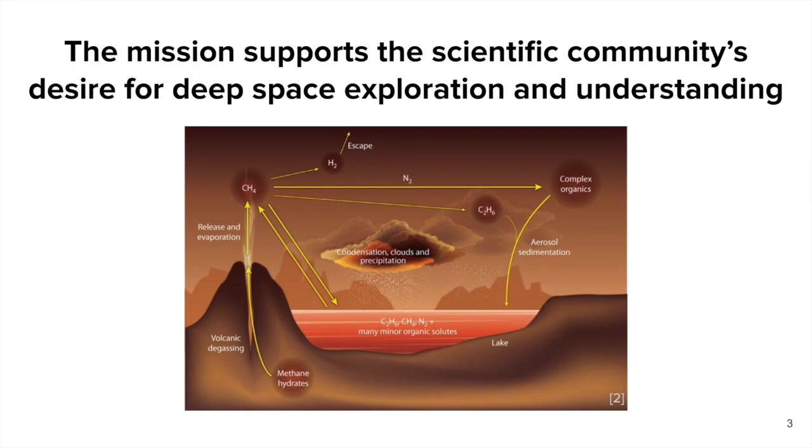An important component of attaining this goal of scientific discovery and exploration is the distance involved. At its closest, there are roughly 1.2 billion kilometers between Earth and Saturn. This means that signals from Earth to Saturn, and therefore Titan, take a full hour and a half going either direction.

This means that our vessel must be completely autonomous. We can't wait 3 hours every time we need it to do something.

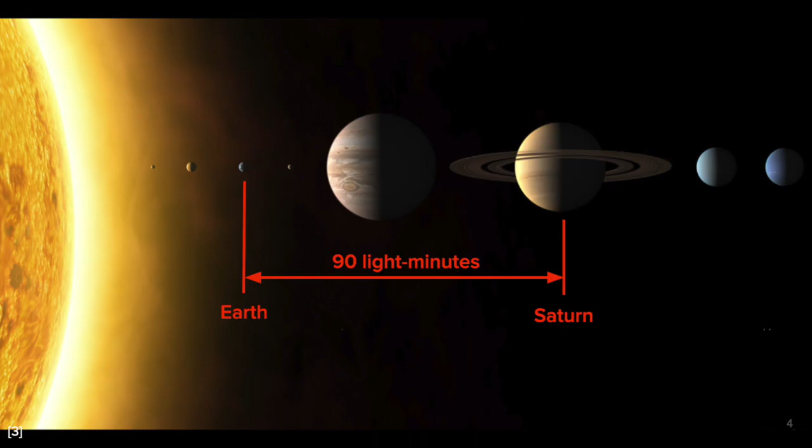Orbiting around Saturn are 15 roughly moon-sized objects named after the Titans of Greek mythology. The largest of these bodies is our goal, Titan.

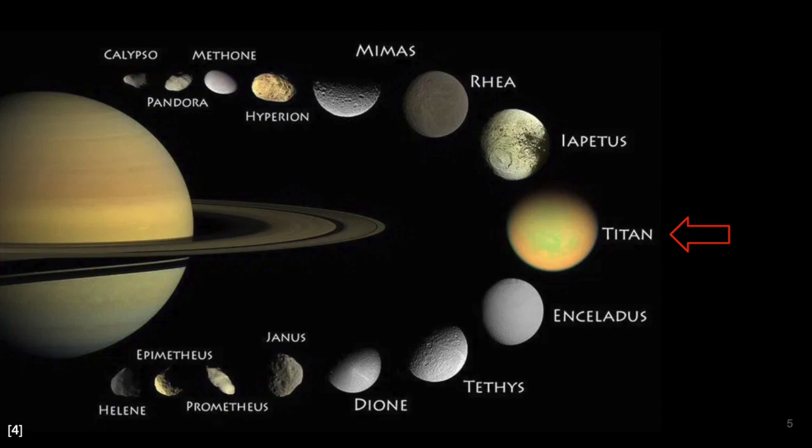Given a spacesuit capable of handling the cryogenic conditions and an oxygen supply, a human could feasibly walk about Titan's surface. The 150 kilopascal pressure is not too dissimilar from Earth's 100 kilopascals, and the gravity is comparable to that experienced on Earth's moon.

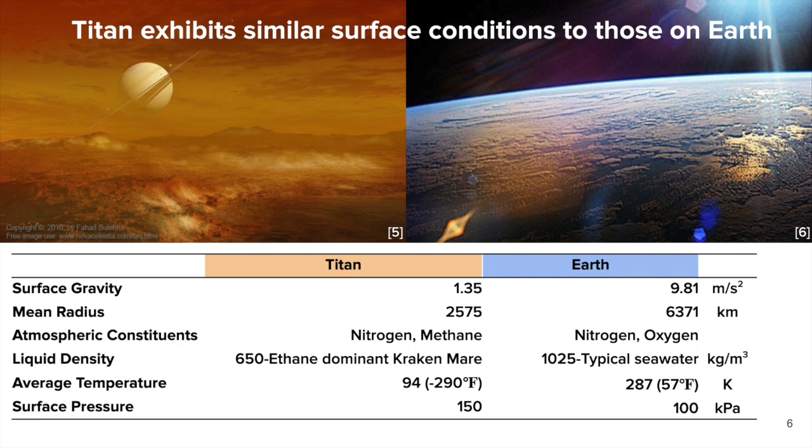A walk about the surface would present some familiar geological features, like mountains, volcanoes, rivers, valleys, and lakes. Looking up, you'll see the thick, hazy atmosphere of Titan, a trait shared by no other moon in the solar system.

We plan on landing in Kraken Mare. The hydrological cycle creates a larger methane concentration towards the polar regions due to precipitation flushing out the other elements. This produces a higher concentration of methane in Ligeia Mare, giving a density around 450 kilograms per meter cubed.

Kraken Mare faces less of the methane flushing, resulting in an ethane-dominant fluid composition around 650 kilograms per meter cubed. This 650 kilograms per meter cubed is more comparable to the 1,000 kilograms per meter cubed water found on Earth, and also represents a far less volatile liquid than the methane-prominent polar seas.

Deep space communication logistics play a role in where to land as well. To reduce cost, mission plans are to use direct-to-Earth communications instead of compiling a multi-layer mission paired with an orbital satellite. Direct-to-Earth communications produces an opportune window for signal, thus the mission is being designed for Titan's next summer period, 2047.

The vessel will explore autonomously for a minimum duration of 1 year, collecting data while cruising at a rate around 0.2 meters per second.

During the summer time period, the forecasted surface conditions are favorable for surface exploration. Wind speeds are not expected to rise above 1 meter per second, remaining around 0 to 0.3 meters per second for most of the mission.

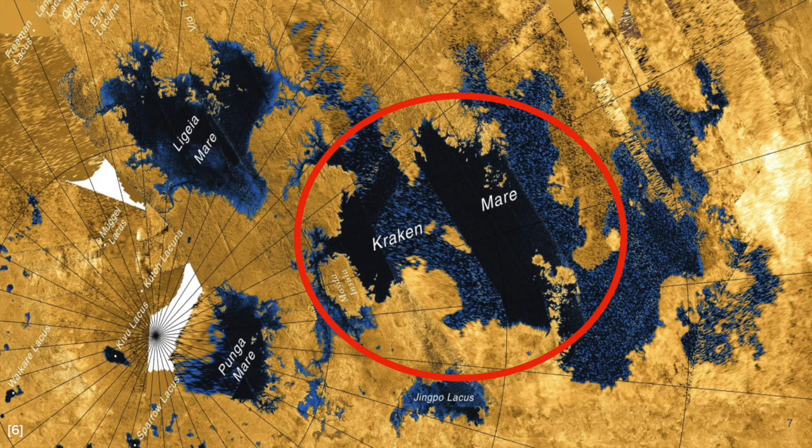We defined 5 stages of the mission: entry, descent, splashdown, information acquisition, and end of mission. As we're taking a naval architecture approach to a problem which has mostly been looked at by rocket scientists, we decided to leave items like the heat shield and rocket design to people who specialize in that area.

Our main focus and scope thus became information acquisition, with a feasibility focus on splashdown and end of mission details.

Upon splashdown and deployment from our heat shield, the vessel will operate autonomously via our acoustic depth sounders and camera navigation systems. The vessel is designed to be self-righting to prevent capsizing during deployment and in the event of unforeseen weather conditions.

Although the detailed autonomy design falls out of our scope, we expect a fairly rudimentary system intended to prevent beaching while underway. Depth pings are relayed from the sensors to the computer, generating a bathymetry map while concurrently tracking its previous surface positions to build a map of the lake.

The system tracks previous surface positions to build a map of the lake. If too shallow a depth is experienced, the vessel adjusts course until a more ideal depth is maintained.

An important consideration for this project is feasibility. The difficulty of landing a rocket on a moon so far away from Earth is a serious obstacle, and as we aren't rocket scientists, we have to confirm that this mission concept is feasible.

One of the ways we did this was by looking at previously proposed designs for similar missions. These are renderings of two previous proposals, a boat design as well as a submarine. Design work for each of these concepts was a collaboration between individuals at Johns Hopkins Applied Physics Lab, NASA Glenn Research Center, and Penn State Applied Research Lab.

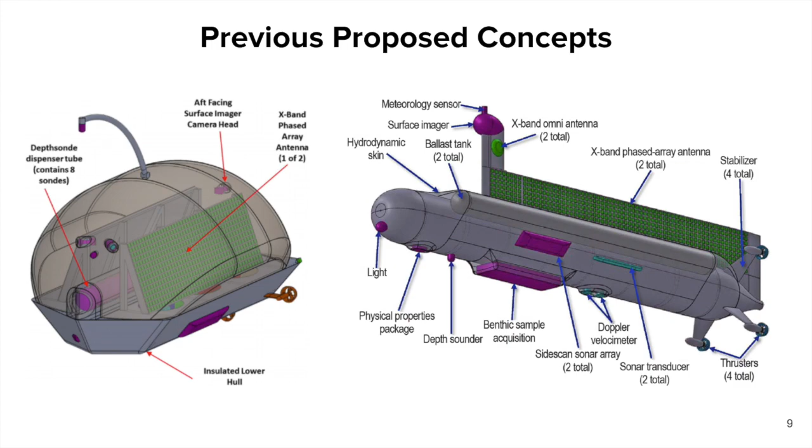An early design decision was the choice between a submersible and a surface vessel. We chose a surface vessel because it allows for a more robust design with a simpler mission profile. The robust design is necessary because of the potential for so many unknowns regarding density, viscosity, and depth. With this simpler mission profile, we aim to solidify scientific knowledge to allow for future exploration on Titan.

The major functions and capabilities of our vessel are detailed in the owner's requirements. Our vessel will land and operate on Kraken Mare, the largest lake on Titan. It will survive in all foreseeable weather and marine conditions.

The wind on Titan is typically low, between 0 to 0.3 meters per second, and the temperature design point is negative 290 degrees Fahrenheit, around 90 Kelvin. At this temperature, the hydrocarbon lake is expected to be near its triple point, although freezing is not thought to be common, and the ice formed would sink instead of floating.

All structures will withstand launch and landing forces equivalent to roughly 10 Gs on Earth. The vessel will be designed to be self-righting in case of capsize upon landing or any unforeseen weather conditions.

The vessel will operate completely autonomously for a minimum duration of 1 year, collecting data while cruising at a rate around 0.2 meters per second. A 1-year mission profile was chosen because, given our design speed, this would allow for at least one north to south trip, achieving the scientific goal of characterizing the possible changes in liquid composition along the length of Kraken Mare.

The vessel will be equipped with a power generation system capable of providing sufficient electrical power to the navigation, scientific package, and communication systems. The scientific package focuses on collecting information regarding the organic composition of the lakes, the lake bathymetry, and the marine and atmospheric conditions encountered.

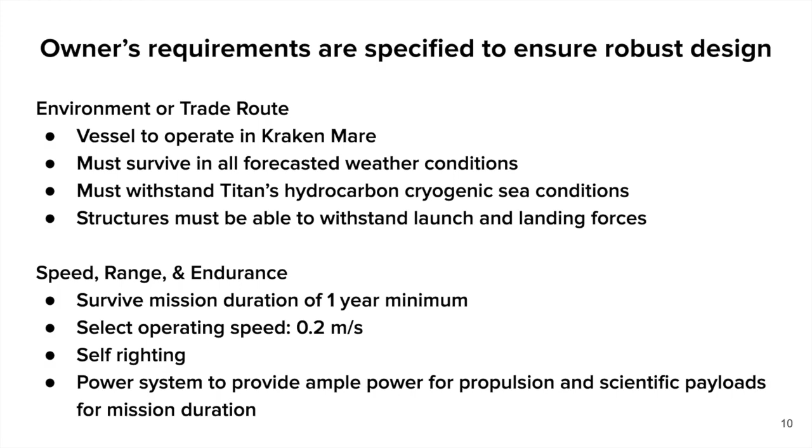The vessel and heat shield are required to fit in the standard Atlas V aeroshell. These were the major limitations determined for an early stage design. However, this is not an exhaustive list. The vessel will comply with all international space law restrictions and U.S. regional jurisdiction.

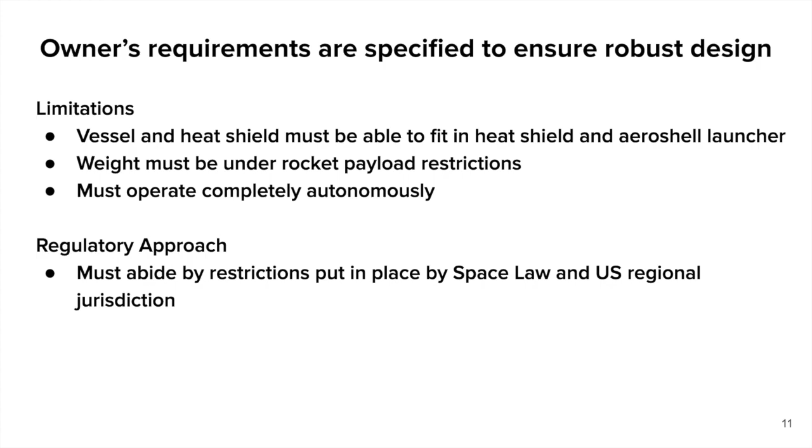This is a rendering of our current design. We've named our design the Space Research Vessel Oceanus. In Greek mythology, Oceanus was the Titan god of the world's seas and waterways.

We had to consider volume limitations in our design due to the Atlas V rocket payload fairing dimensions. The rocket system was arbitrarily chosen and not considered to be within the scope of the design. The vessel is to be nested in a heat shield within the payload fairing to prevent burnup upon atmospheric entry. Volume and mass limitations were observed during our design process to produce a concept feasible of being delivered with the Atlas V 500 series rocket.

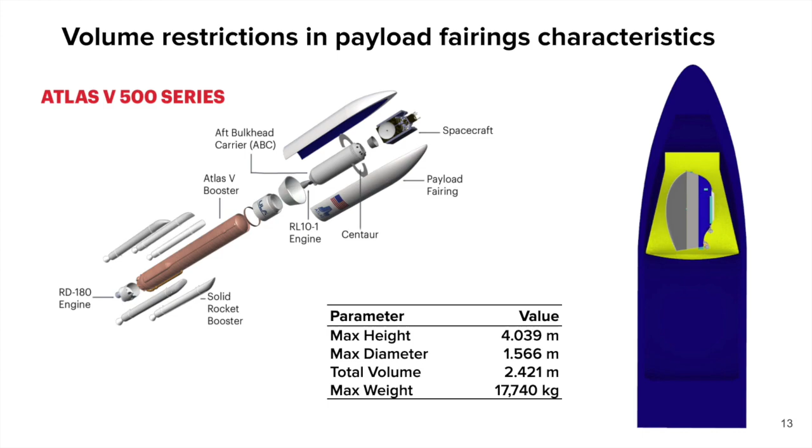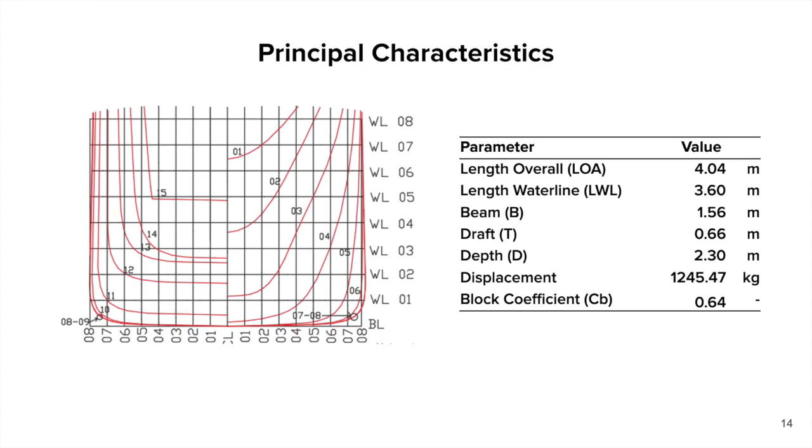The upper hull required special material consideration to preserve material strength while allowing the antennas to transmit data, which requires a radio frequency transparent material. Silicon carbide was selected based on its known use in deep space telescopes, such as the one aboard the New Horizons spacecraft. This material is known for stability in cryogenic temperatures, and it has a similar fabrication process to aluminum.

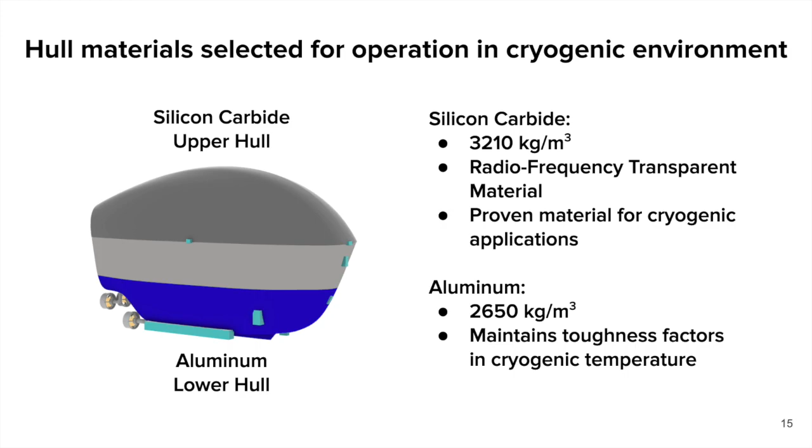Due to the material properties of the upper hull, a significant portion of the vessel weight is placed at a high vertical center of gravity. To compensate for this weight and maintain a positive GMT, small permanent ballast weights totaling 70 kilograms were added to the bottom of the hull.

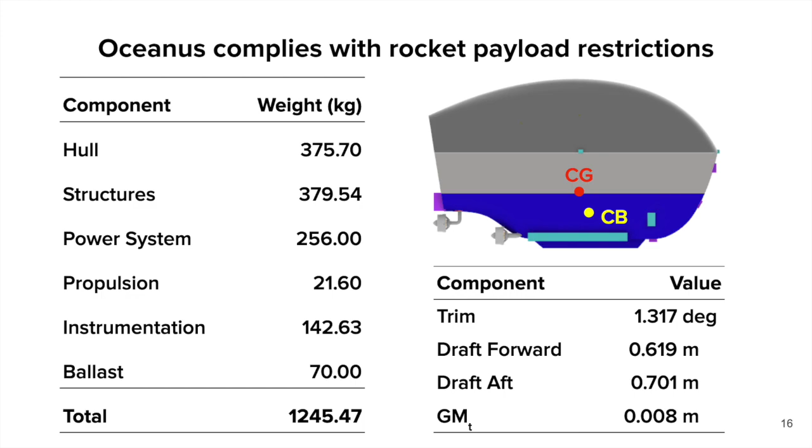The hull weight shown includes the upper hull, lower hull, and insulation. With the total weight of the vessel at 1,246 kilograms, the vessel is still well below the rocket payload restriction of 17,740 kilograms. The trim of less than 2 degrees will not affect the operation of the instrumentation.

The general arrangements of Oceanus allow optimal use of all equipment and machinery. The arrangements are split into instrumentation packages based on function. We have a navigation package, a science mission package, a communications package, and the power generation machinery.

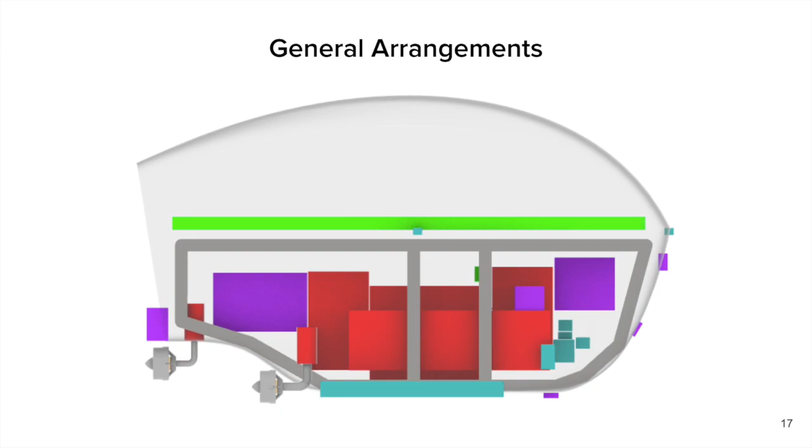The vessel is equipped with the necessary instrumentation to achieve autonomous navigation. This instrumentation package includes 2 acoustic sounders, 3 external cameras, a Doppler velocity log, an inclinometer, 2 inertial measurement units, 2 sonar side scanners, and a computer for data storage and processing. The redundant inertial measurement units also include accelerometers. Radar and LiDAR remote sensing are not operational underwater, so Oceanus operates with sonar sensing.

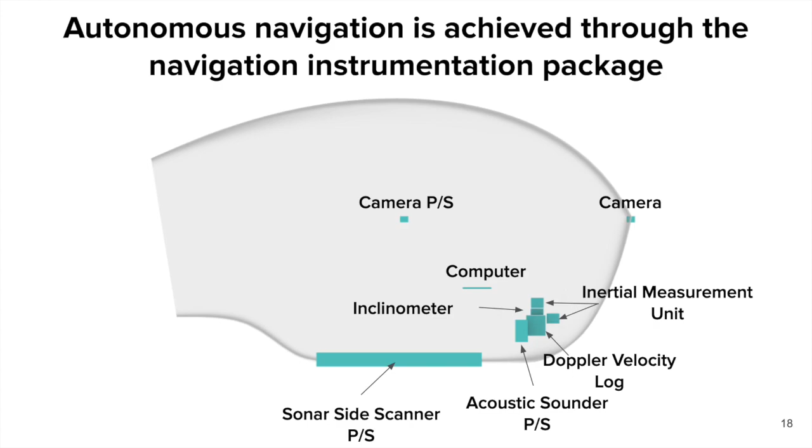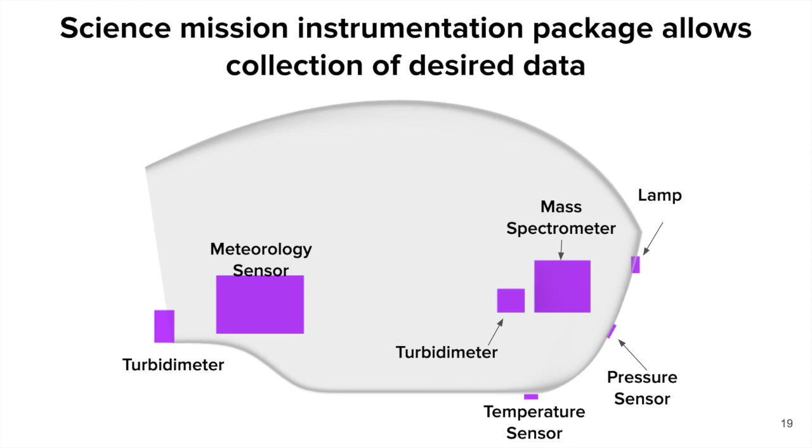The Science Mission Instrumentation Package includes all equipment required for the mission detailed in our owner's requirements. The lamp, meteorology sensor, miniature mass spectrometer, pressure sensor, temperature sensor, and turbidimeter allow the collection of data desired to study the methane cycle on Titan, the composition of the lakes, the marine conditions, and the atmosphere.

To achieve direct-to-Earth communication, our vessel has a radio antenna and associated radio equipment, which will operate on the X-band. The radio antenna is arranged similar to a deck in order to obtain desired surface area to achieve quality communications to Earth. The combined estimated mass of the navigation, science, and communication instrumentation packages is roughly 142 kilograms.

The maximum possible power draw if all instrumentation were to be run simultaneously is 660 watts.

The Advanced Stirling Radioisotope Generator was selected for this design because of the reliability provided by thermal nuclear power. The ASRG uses heat from a decaying radioactive isotope in a general-purpose heat source to drive a Stirling generator to produce DC current. This design will feature 8 ASRGs, which will provide approximately 900 watts of power 13 years after commissioning. The ASRG is currently a developing technology expected to be completed in 2028.

These generators were selected over the existing multi-mission radioisotope thermoelectric generators because they are smaller, more efficient, and use 1/4 of the plutonium isotope. Each unit has a relatively small mass and volume at 32 kilograms and 0.136 cubic meters respectively. Due to their high operating temperatures and approximate 30% efficiency, the ASRGs also double as an internal heat source to keep the vessel's interior temperature suitable for electronics despite the cryogenic exterior environment.

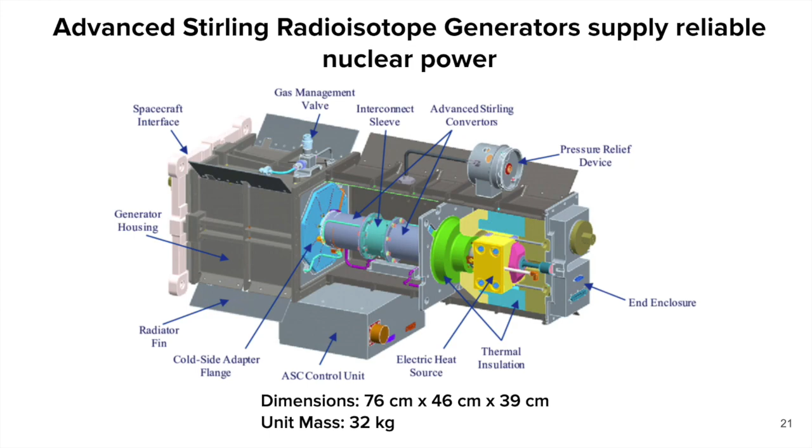The 8 ASRGs, as shown in the rendering, have the largest quantity of mobile mass, so their placement is crucial to the hydrostatic properties of the vessel. They are located as centrally as possible within the vessel to maximize symmetry in weights and available volume.

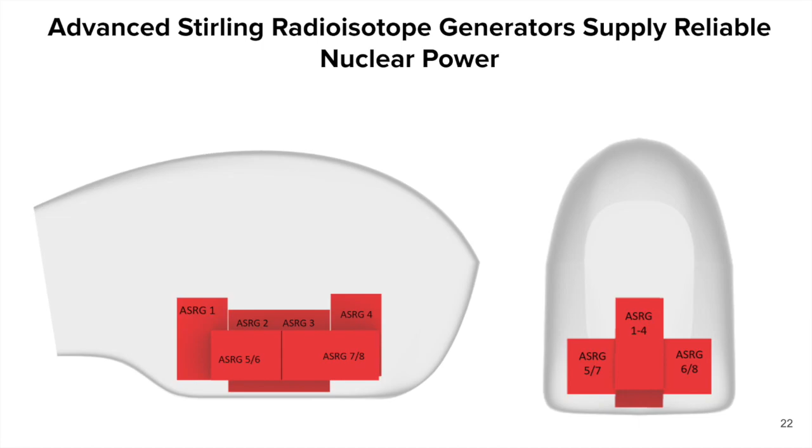The arrangement of the equipment on board Oceanus allows for effective autonomous navigation, data collection, and communication to Earth. The placement of all other instrumentation and machinery below the radio antennas is required in order to keep sufficient antenna area for communications.

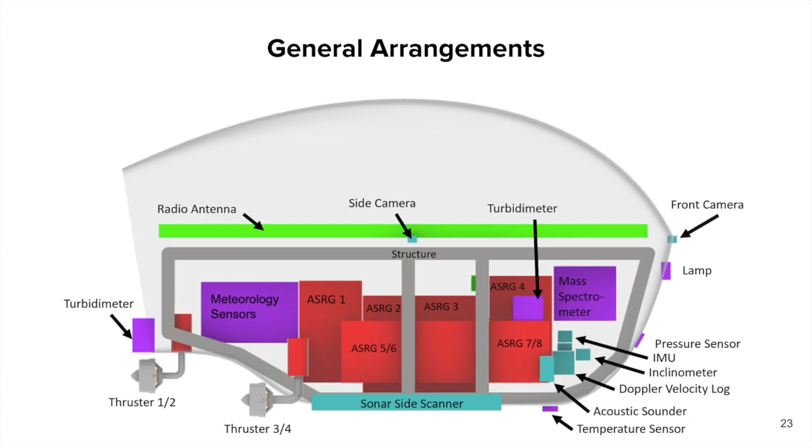Given the hull geometry and weight distribution, we can now begin talking about vessel dynamics, beginning with stability. Due to low wind speeds, scientists do not expect waves to occur in Kraken Mare. However, little is known about the sea conditions, making seakeeping analysis infeasible. To still allow for operations in the unlikely case of large winds or high sea state, the vessel is designed to be self-righting. The bubble-like shape of the superstructure, along with considerations for longitudinal centers of gravity, allow Oceanus to return to an upright position for all heel angles. The stability curve generated by Orca 3D confirms this self-righting capability.

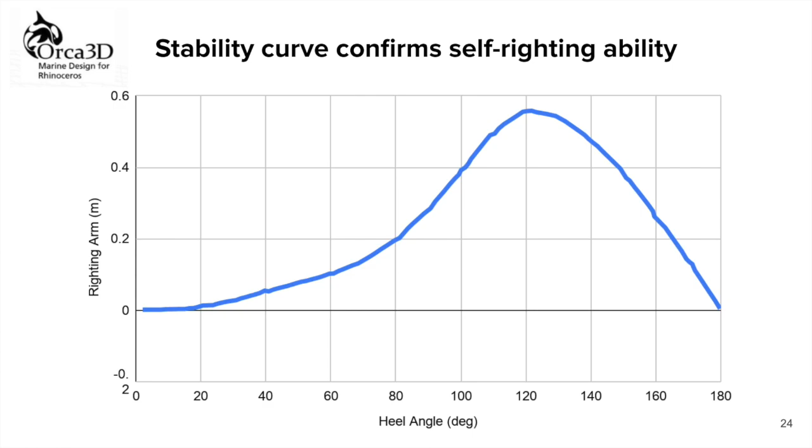Moving on to the vessel's propulsion system, a trade study was conducted to determine the best suited propulsion method for our design. Previous proposals expressed a desire for a trade of propulsion systems such as paddles, shafted propellers, pumps, water jets, thrusters, and podded propulsion. We also looked into other propulsion methods including aeronautic propellers, cyclorotors, magneto-hydrodynamic drives, mirage drives, and sails.

We traded the methods based on 5 weighted categories: volume, efficiency, mass, arrangements, and reliability/robustness. A large emphasis was put on reliability and robustness, as our vessel will be operating with no access to repair or malfunction solutions. The trade study resulted in 2 methods emerging as viable options for our design: shafted propellers and thrusters. A sensitivity analysis further proved superiority for the shafted and thrusted type propulsions.

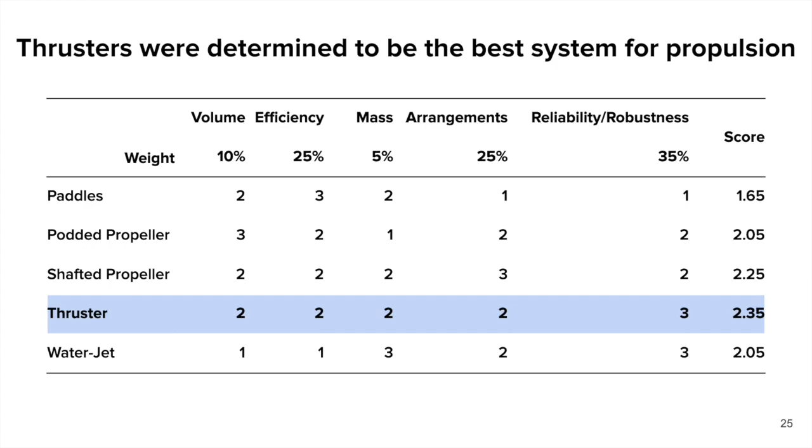In the end, the thruster system was implemented into the design. Many small vessel applications such as ROVs and AUVs operate with marine-grade thrusters, providing ample precedent for future design work. The ability for high maneuverability and industry-vetted technology makes the thruster system a competitive choice for the final design.

To determine the needed thrust, resistance calculations were determined with special consideration to the non-traditional operating fluid. With a Reynolds number of 1.35 times 10 to the 5th, the vessel drag was determined to be friction-dominated. Hull resistance was calculated using the University of British Columbia, or UBC's, power prediction method for small ships.

This method utilizes the ITTC friction line to determine friction drag, while form drag is solved for using geometric characteristics of the ship with data from testing. The spreadsheet allowed for input values for fluid density and viscosity, so values were tailored for the Titan environment.

The UBC method was also used for air drag. Fluid density was again changed to represent Titan's atmosphere. For the high wind case, the vessel's speed was kept constant at 0.2 meters per second, with a bow wind of 1.5 meters per second for a relative velocity of 1.7 meters per second.

The appendage drag accounts for a considerable portion of the vessel's total drag due to several instruments being housed outside of the hull. Appendage drag was solved for each appendage assuming no flow interaction, and drag coefficients were determined by the approximate shape of each appendage. Using these methods, the total drag for normal operation was determined to be 2.89 newtons, and for the high wind condition to be 24.09 newtons.

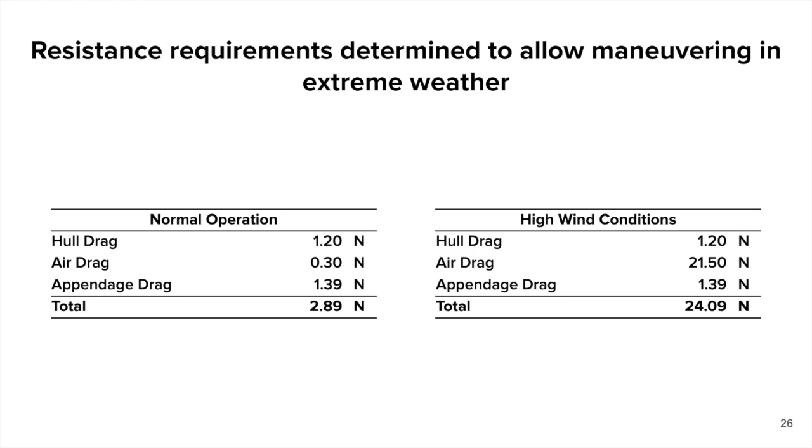The vessel drag was used as an input to determine the required power for the propulsion system. The thrusters were sized to be 12.7 centimeters in diameter based on existing ROV thrusters and space available under the transom. The sizing and weight of the thrusters was found based on Earth models, but the required power and propeller efficiencies were found using actuator disk theory to better account for differences in performance due to changes in operating fluid.

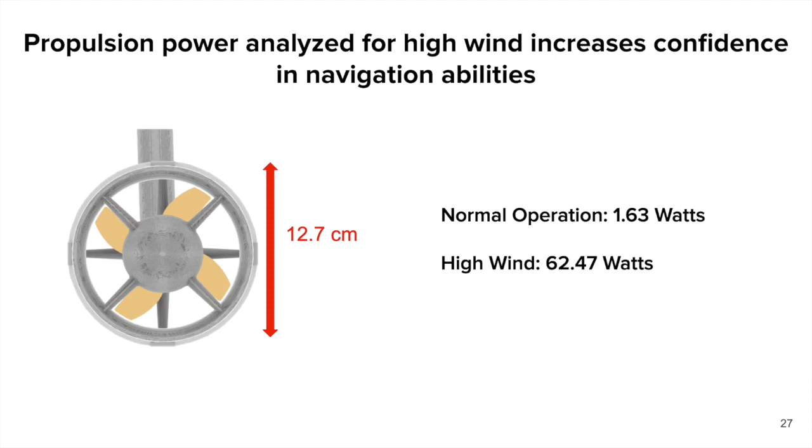In addition to propeller efficiencies, power calculations included a bevel gear efficiency of 98%. Powering requirements were evaluated for both normal and maximum wind operating conditions. The propulsion power used for the power mode consideration is the maximum wind value of 62.47 watts.

Maneuvering of the vessel is achieved by the arrangements of the thrusters, where 4 thrusters are used for vectored-based thrust. 2 thrusters are placed on each side of centerline so that the vessel can still operate with only 2 thrusters, so long as they are one on each side of centerline.

A skeg was added to the design to ensure straight line stability. The skeg was based off of fishing boat skeg data due to similarities in length to beam and beam to draft ratios.

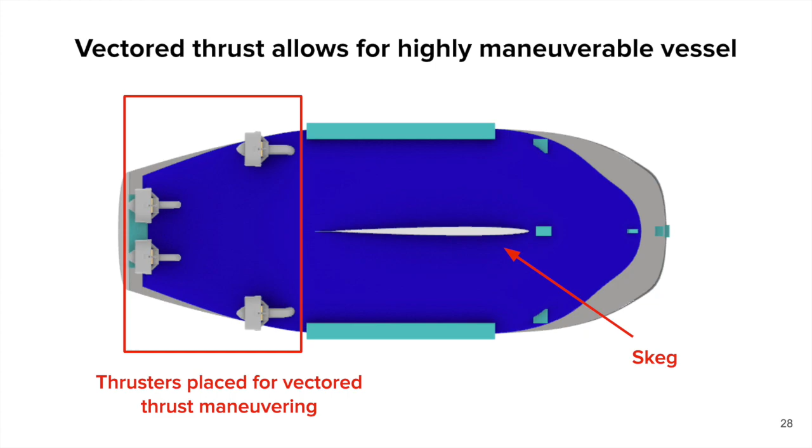The electrical analysis was done by determining certain sensor and equipment packages needed during a specific mode of operation. For simplicity, 2 modes of operation were analyzed: the surface cruise condition and the functional/communications condition. Operating with multiple modes eases the electrical strain on the system.

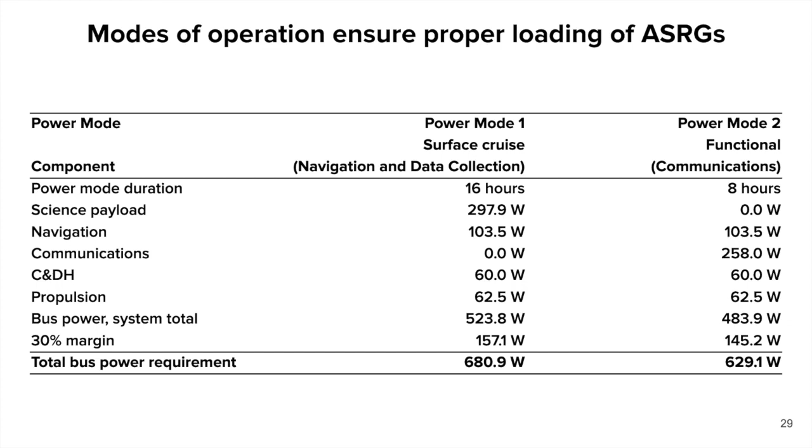The surface cruise condition is composed primarily of the navigation and scientific mission electronics, while the communication condition uses the antennas and radios to transmit stored data directly back to Earth. Future design iterations should result in more load conditions, as not all the scientific mission equipment will be running at the same time, making our load analysis a conservative estimate.

The electrical one-line was designed to meet a high level of redundancy and reliability. The system functions at 50 volts DC to accommodate the operating conditions of the majority of the equipment.

Auctioneering diodes were used with multiple load connections to ensure that the load is being powered by one source at a time. If a fault in that system were to occur, another source would provide the power necessary to keep the equipment running. The number of sources per diode is dependent on the reliability of the system and mission requirements.

For the purposes of this design iteration, 3 connections per package and thruster were implemented. 3 sources per load is just an arbitrary configuration to explain our reliability-focused one-line design, but the number of sources could increase or decrease in future design iterations depending on specific instrumentation reliabilities.

Each instrument or equipment package would be specifically made and custom designed for the given application, so more accurate reliability information won't be available until that equipment is produced.

Another source of reliability and redundancy in the system is the physical design of the powering and propulsion. 4 thrusters are incorporated in the design, but if failure were to occur, the system would still be viable to run with as few as 2.

The navigation system utilizes doubled equipment crucial to operations to prevent mission failure in the event of a single-point equipment malfunction. The VFDs and motors per thruster shaft are duplicated to provide another level of redundancy and reliability for the unit. As described, a large focus was put into making the system as redundant and reliable as possible.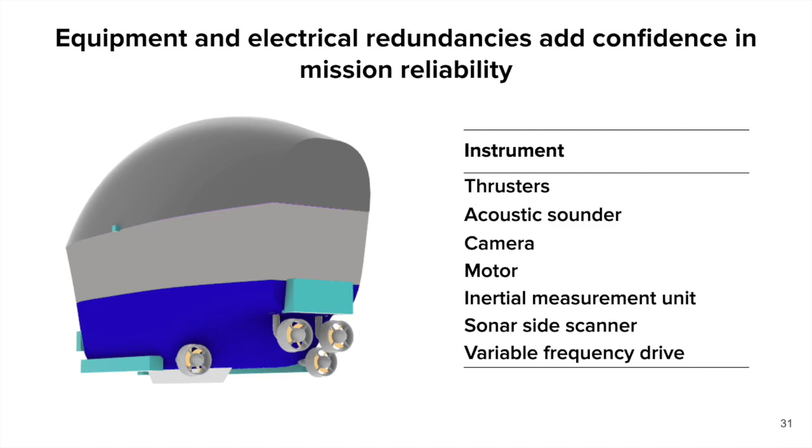Given the nature and scope of the mission, operational success is an immense priority and there should be little margin for error. Because of the stress we've put on operational success and reliability, it was paramount to design a structural configuration which could withstand anything that's thrown at it.

The structure is made of 10 centimeter aluminum 5083 rolled bar with the instrumentation attached directly to the members. This alloy is also used in the Bradley fighting vehicle for a similar application.

Generally, ship structural analysis includes longitudinal bending analysis. This is found by calculating the longitudinal strength, the loading conditions, and sectional areas.

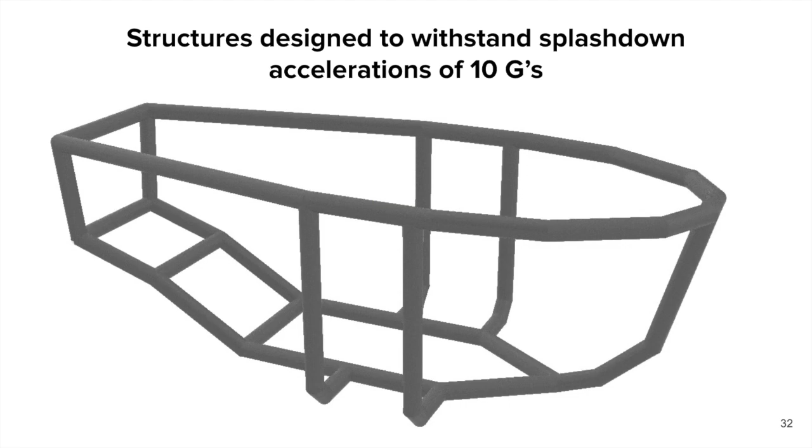Because the waves on Kraken Mare don't exceed 20 centimeters, and because SRV Oceanus doesn't have dynamic loading, splashdown loads are several orders of magnitude larger than these typical ship loads. The highest loads which spacecraft are typically subjected to occur during takeoff and landing. This is especially true for Oceanus, which is expected to see accelerations of up to 98.1 meters per second squared, or 10 Earth Gs, during its splashdown into Kraken Mare. These are the loads which the structure was designed to withstand.

Using these loading values, a finite element model was generated using Dassault Systems' Abaqus FEA program. Although the loading of the structure would be dynamic, it was generalized into a quasi-static analysis for this project. The boundary condition utilized for this was an encastre condition, cementing the entire transom of the vessel in place. This is a worst-case approximation, as lateral movement would have reduced stress concentrations in this aft region.

This analysis also utilized C3D10 tetrahedral solid elements, and the loads were applied by taking the mass of the entire craft, except the structure itself, and multiplying this by 98.1 meters per second squared. This was then split up and applied at the mounting points between the structure and interior. Also, a gravitational load of 10 Gs was applied on the structure itself.

The structure was then further analyzed by performing buckling analysis using Euler beam theory with the generalization of a pinned-free beam. This figure shows the deflection magnitude inside of the model. The maximum, as you can see, is roughly 6.5 centimeters.

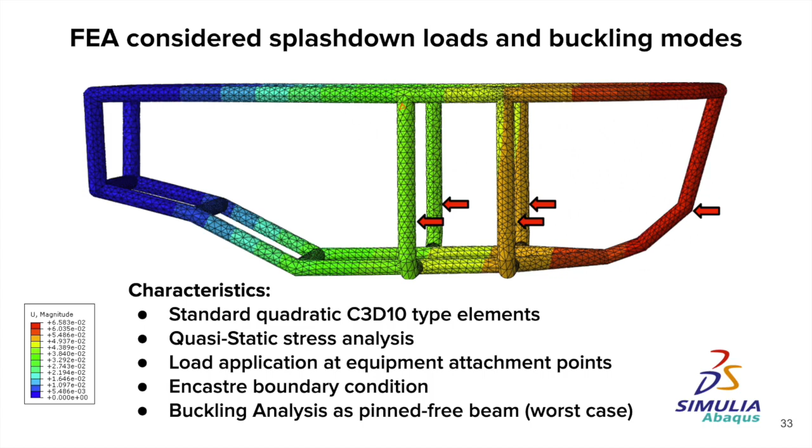The most important output from Abaqus was the stress of the structure when all loads were applied. Staying within the ultimate yield strength of aluminum 5083, and if possible inside its elastic region, was an important factor impacting the design. This figure shows the stress distribution of the structure, with the largest stresses shown in the aft portion near where the vessel contacts the heat shell.

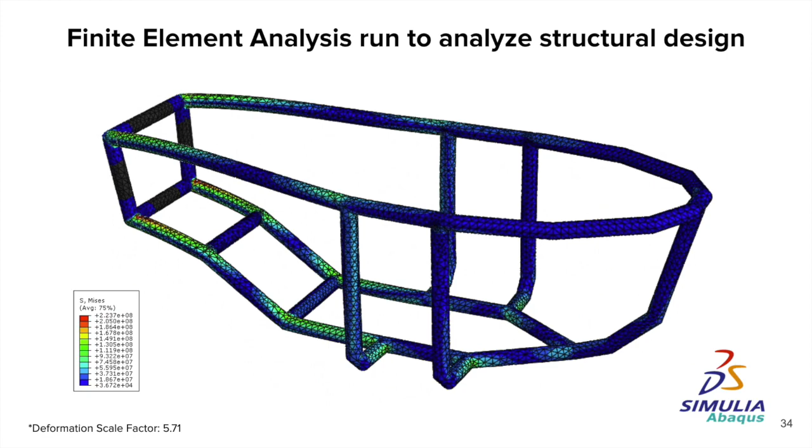An important part of any FEA study is the convergence analysis. For this study, convergence was found around 32,000 elements. The maximum von Mises stress is shown in blue, while the buckling stress is in yellow and the maximum yield stress of aluminum 5083 is shown in red.

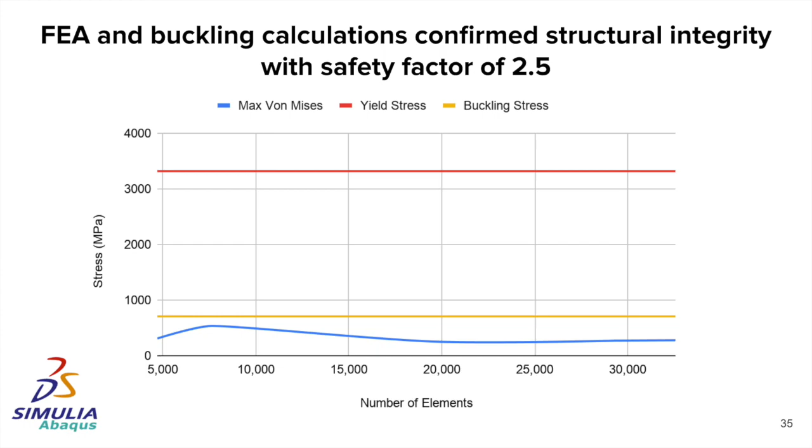As you can see, there is a safety factor of 2.5 for buckling and a safety factor of just under 10 for the yield stress. This is in line with the structural design's overall intent to provide a lightweight but sturdy structure capable of withstanding any load that is likely to be experienced.

After we completed an FEA analysis of Oceanus' structure, we did an additional case study into the heat transfer between Oceanus' 8 ASRGs and Titan's atmosphere. The motivation of the study is to know if our instrumentation will be operating in extreme cryogenic temperatures or in their designed temperature regions of 250 to 300 Kelvin.

Using STAR-CCM+, a computational fluid dynamics software, we were able to successfully simulate the temperature contours of Oceanus' inner cavity, hull, and Titan's surrounding atmosphere. Oceanus is designed with 3 layers of insulation for the cryogenic environment. First is a neon-filled inner cavity, which is where the instrumentation lies, followed by a 5 centimeter thick Spaceloft insulation that wraps the entirety of the inner hull, and finally an aluminum hull that is 7 millimeters thick, made from alloy 5083. The thickness of the 3 layers was modeled after the previous Titan submarine design.

In this picture, you can see the geometric domain of the simulation, where the teal prism above represents the ethane-methane atmosphere, while the dark blue region below represents the ethane-methane lake. For this simulation, we kept Oceanus at a draft of 0.6 meters, but due to late-stage design changes, the final draft of Oceanus is actually 0.66 meters. The difference in draft is important to note, but due to the computational time, we are going to neglect the changes of the draft for this study.

Additionally, where the fluid and gas regions meet is a free surface where free surface waves were created and temperature can flow between the 2 regions. Lastly, the light gray boxes to the right you see are mesh refinement volumes.

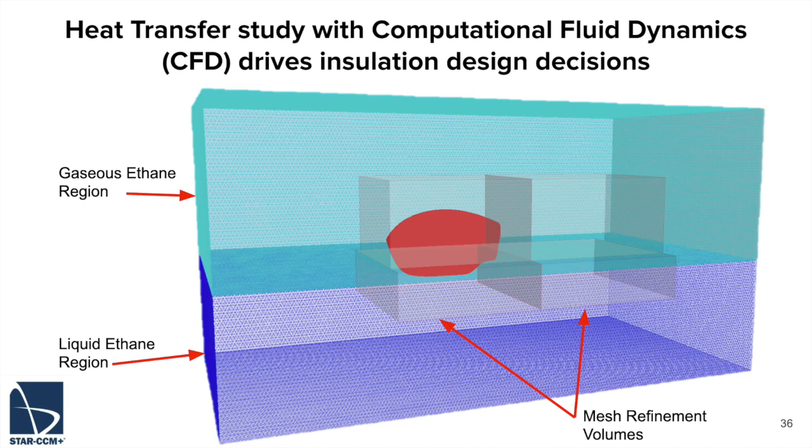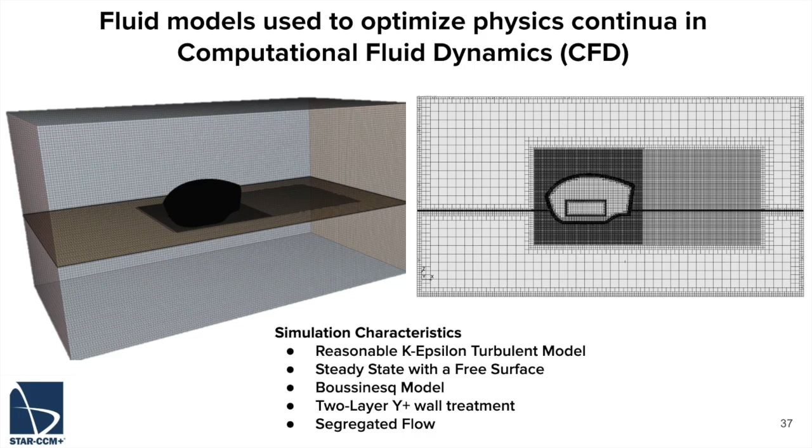After the convergence of the mesh, a turbulent flow model was selected based off the calculated Reynolds number. A reasonable K-epsilon turbulent model with a 2-layer wall treatment, as well as a segregated flow, was chosen. Lastly, a VOF (volume of fluid) model was chosen to simulate Titan's gravity of 1.354 meters per second squared into the physics continuum to ensure the proper draft as well as free surface effects were recorded.

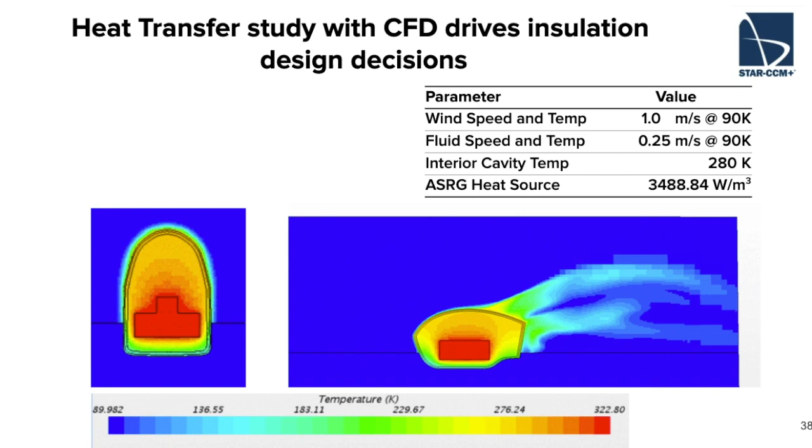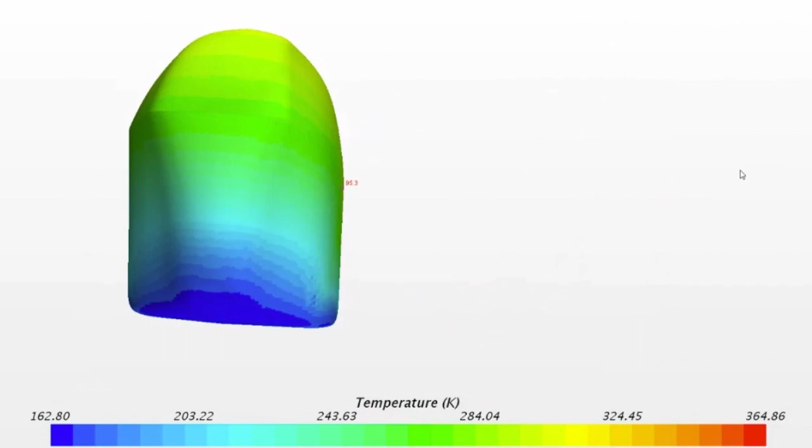This plot brings up issues with our design and with cryogenic regions at the bow as well as along the keel. To fix this, more insulation will need to be added to the design in those regions, and a new heat study will have to be conducted.

The results also show that the design of the antenna bubble does an excellent job of expelling heat into the atmosphere with its high surface area to volume ratio.

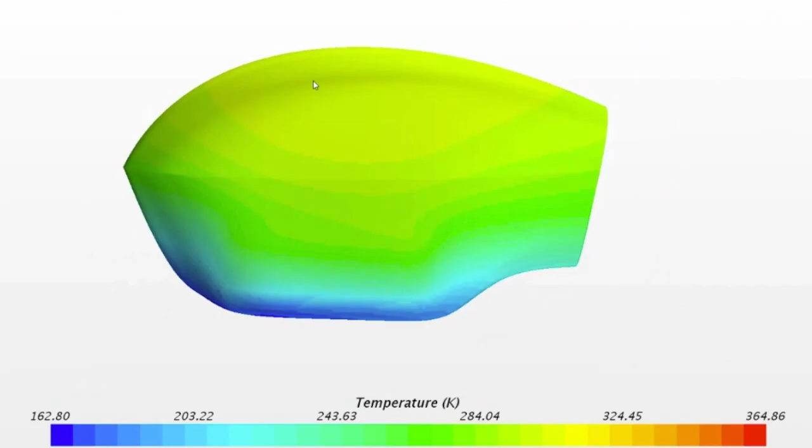This video is showing a three-dimensional isometric contour plot of the entire simulation region. The three-dimensional volumes seen are showing regions of coherent structures in space. The structures have very similar physical properties as well as velocities and are plotted with a temperature field function.

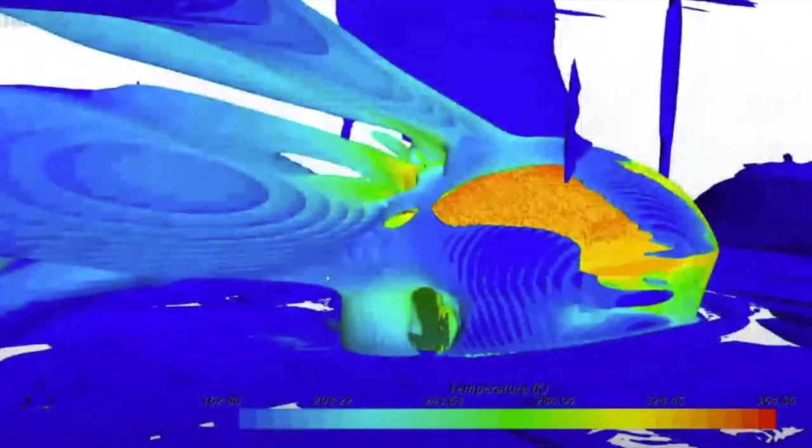The 3D rendering shows small boundary layers around the hull and the temperature dissipation into Titan's environment. The structures indicate that the flow around the hull is symmetric, and the majority of the heat dissipation happens quickly after leaving the hull. The turbulence seems to be centered around the design of the rake transom and should require further investigation.

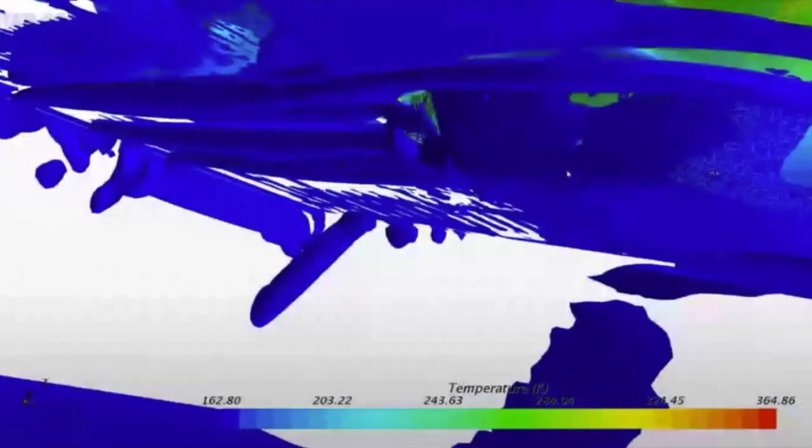Additionally, the flow around the hull indicates laminar flow regions where the four thrusters are located, confirming the placement of them has been idealized for the flow characteristics of the hull.

A significant bow wake is illustrated by the blue cylinders wrapping around the hull and following the transom lines. This was expected due to our low Froude number and design speed.

To prevent any environmental harm to Titan, following the end of mission transmission, the SRV Oceanus will complete her maiden voyage by beaching herself on the southern tip of Kraken Mare. The beaching of her 8 ASRGs will prevent unnecessary spread of radioactive material as the power source decays into its protective casing, with a half-life of 87.7 years.

SRV Oceanus pushes the realm of the possible with its innovative and robust design. It brings a unique solution to the scientific community's planetary research with a naval architecture approach. SRV Oceanus has unmatched reliability and robustness for all of Titan's environmental conditions. With her 8 ASRGs and self-righting capabilities, Oceanus can handle anything that arises on Kraken Mare. With her key features ranging from autonomous navigation to direct Earth communication, SRV Oceanus is ready for its maiden voyage.

So are you ready to take the next small step for mankind and join us in the future with SRV Oceanus? Thank you for your time.